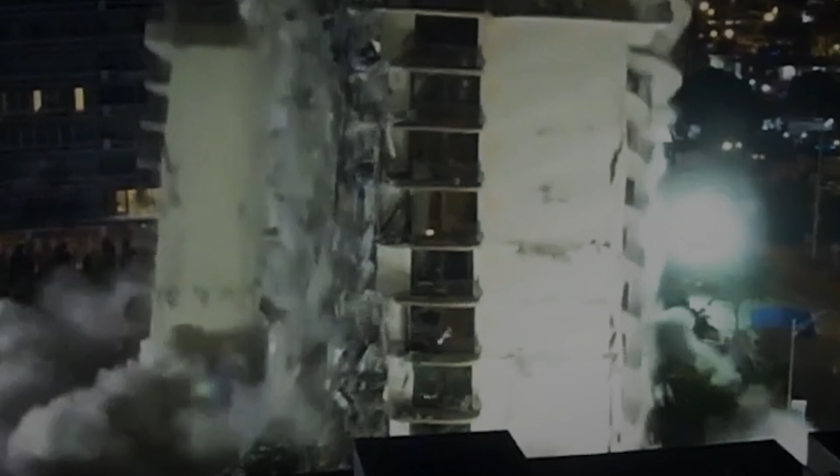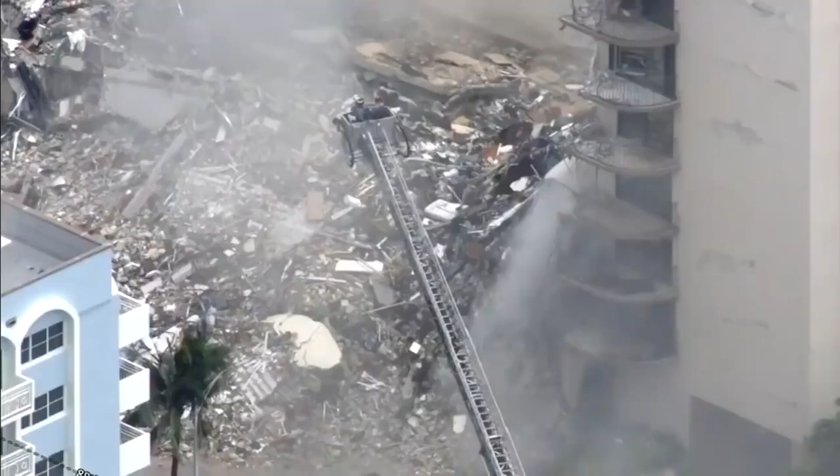For over 40 years, this 12-story condo had been the perfect place to call home, with a beachside view and a pool to enjoy, it was the ideal spot. But on the night of June 24, 2021, the building collapsed. In just a few seconds, it not only turned into a pile of rubble, but 98 lives were lost. All that remained was the broken pool deck, half-standing columns, and concrete chunks.

Hi, I'm Mohsin Khan, an engineer here in New York City, and today we'll look into the Miami condo collapse, one of the deadliest building collapses in American history.

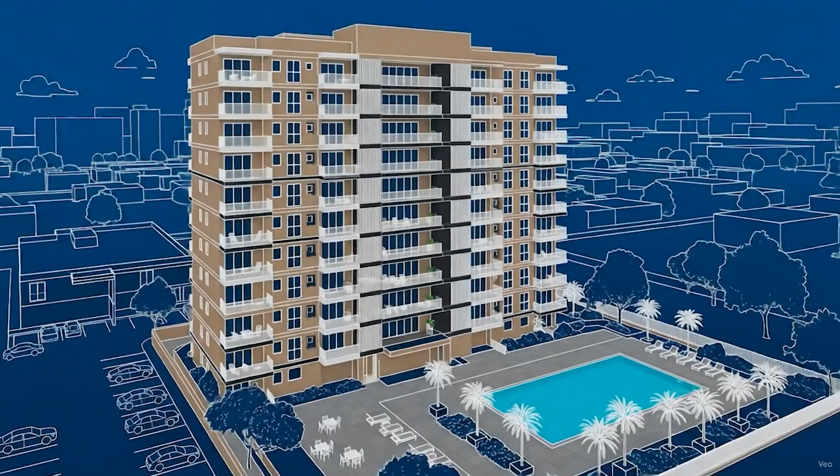On June 24, 2021, at 1:15 a.m., the pool deck of Champlain Towers South collapsed. And the very next minute, at 1:16 a.m., the security guard at the front desk, scared and confused, called 911, but couldn't explain how bad the situation really was.

Okay, I'm trying to track them. Hurry up, there's a big explosion. Okay, sir, tell me exactly what happened. Sir, what's going on? Tell me exactly what happened. I don't know, there's a lot of smoke going on, I can't see anything right now. You see smoke? Get out of here. Sir? Hello?

Before any help could arrive, at 1:22 a.m., the city witnessed a disaster that would change everything. This 12-story condo building where over 100 families lived is completely gone.

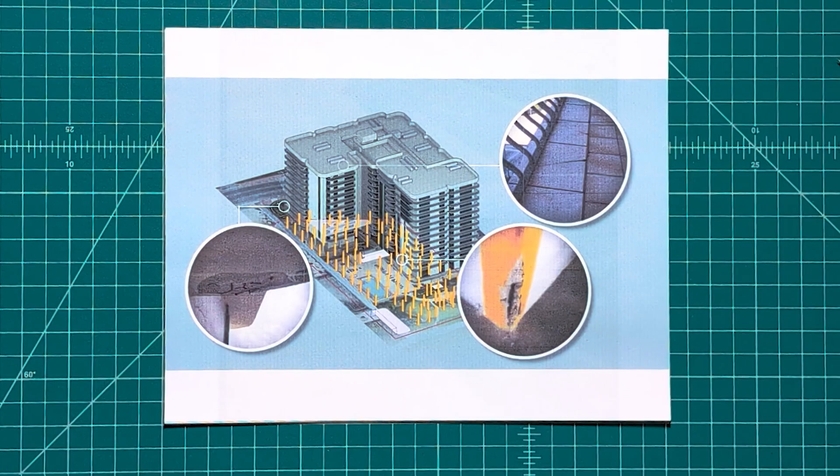But this tragedy could have been avoided, because back in 2018, an engineering report done by Morabito Consultants actually flagged serious problems. It warned about major structural damage, including the exact issues that would later cause the collapse. It pointed out deteriorated concrete and damage to the column, but unfortunately, it seems like no real action was taken. Apparently, they were focused on closing the pool for repairs instead.

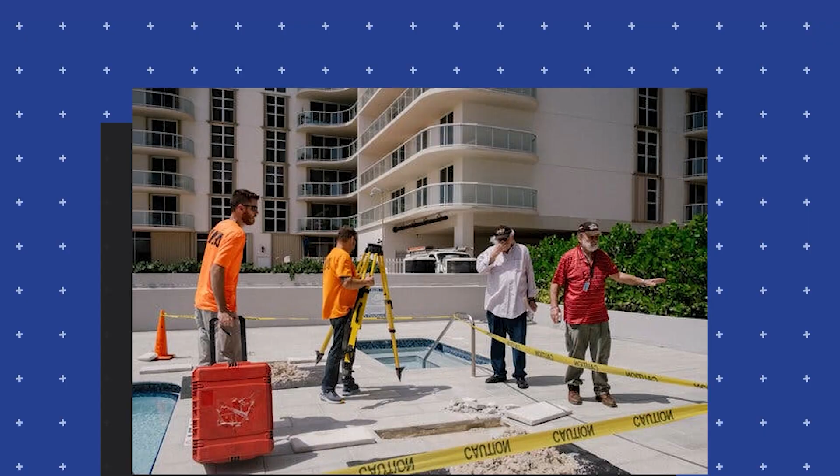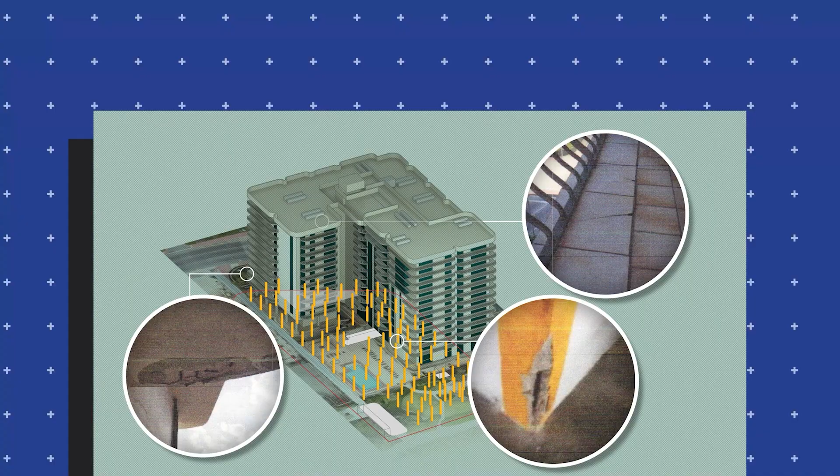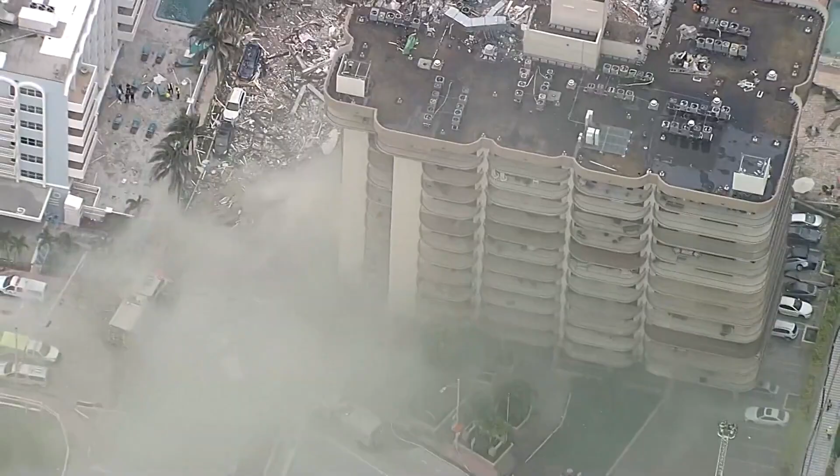This first interpretation does seem to make sense. After all, a lot of what we know about the Surfside condo collapse points in that direction. Engineers and investigators noticed signs of trouble pretty early on: cracks in the concrete, water getting into places it shouldn't, and parts of the structure slowly wearing away over time. It wasn't some big sudden thing out of nowhere. It was slow, it built up over years. Tiny problems that didn't look like much at first, till eventually they added up to something impossible to ignore.

This is often how buildings, even solid concrete ones, can fail. Not because of one dramatic mistake, but because of lots of smaller things being missed or left alone for too long. In Surfside, that's what makes the story especially heartbreaking. People were living their everyday lives, never imagining that the ground beneath them was slowly starting to crumble.

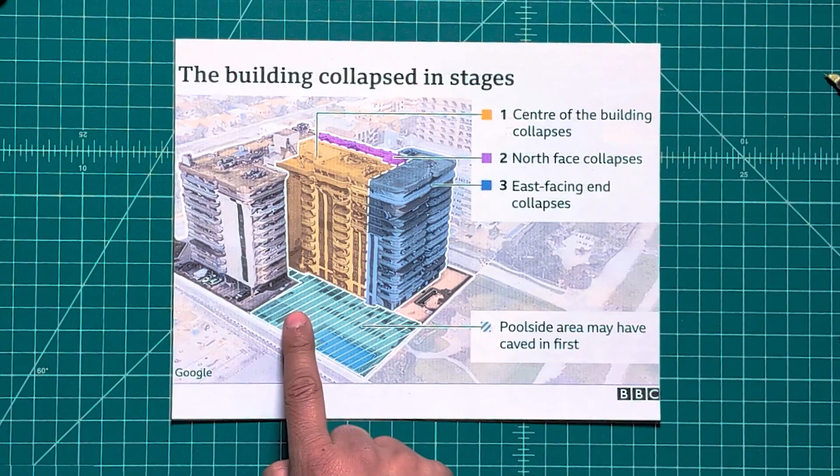It turned out that around 1:15 a.m., before the building had collapsed, it was this particular section, the poolside area, which had gone first. This really put things into perspective, as now it seemed pretty obvious that the slab had started this domino effect. You might be wondering, how can just one slab of concrete hold up an entire building? And honestly, it's a good question to ask. How do these slab foundations work?

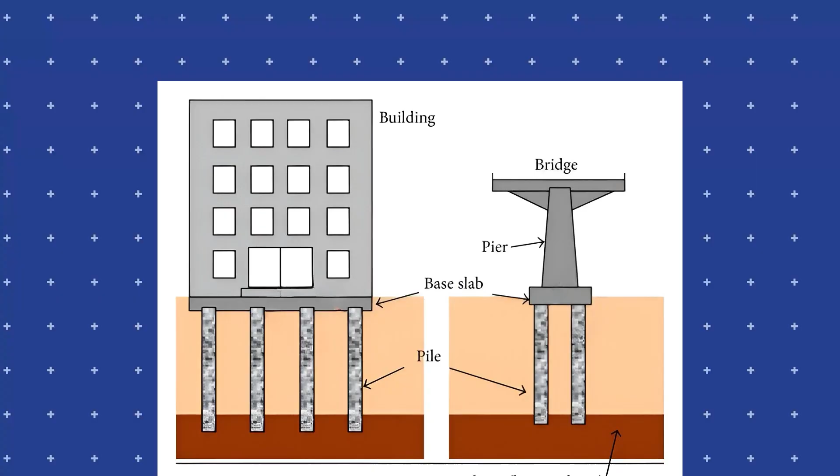This is the kind of foundation system you'll find in a lot of buildings, like the Champlain Towers. If you look at the bottom, you'll see these vertical supports, or what we call a pile. Think of them as the main legs of the building. They go all the way down, and basically, they're there to carry the entire weight of the building on top of it. Now, sitting right above those piles is this big, thick concrete layer called a pile cap.

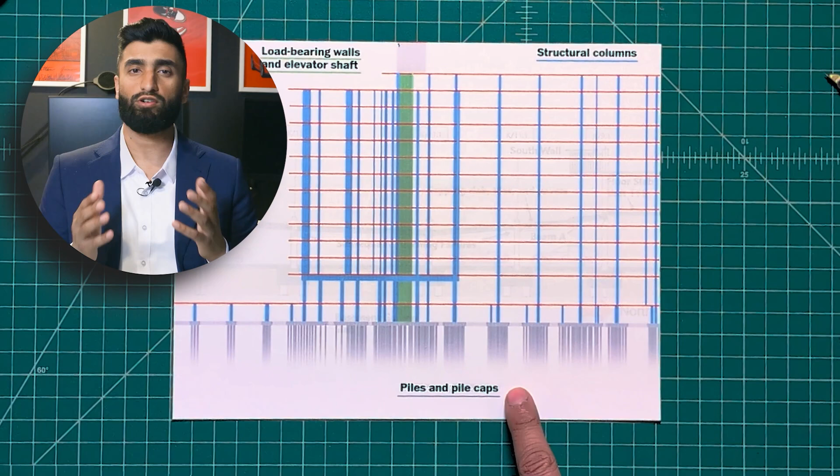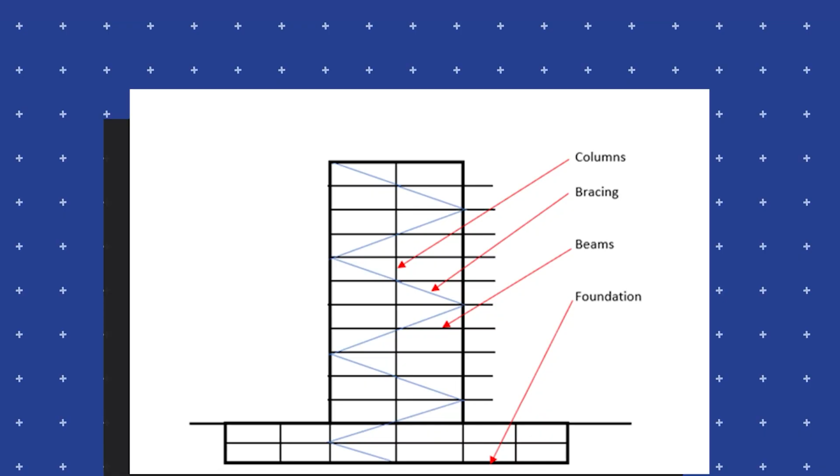Basically, it's a super strong layer of concrete built to take the weight of the building on top through the columns and spread it throughout the area and into the pile it's sitting on. From there, the rest of the building gets stacked right on top of that, all the floors where people live or work. Those upper floors have their own columns and walls, and all of that transfers the load down to the foundation slab and the pile caps at the bottom, which then transfers the load to the piles in the solid ground underneath. With that kind of structural system in mind, let's go back to what happened that night.

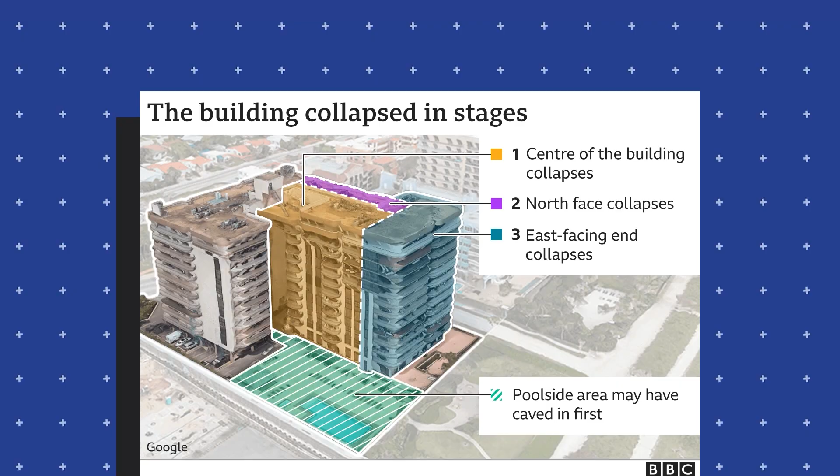Remember, the pool deck was the first part of the building to fail, and that's our clue to where the problem first started. But the entire 12-story building didn't come down all at once. It actually took a few more minutes, about 7, getting us to about 1:22 a.m. for the rest of the building to fully collapse.

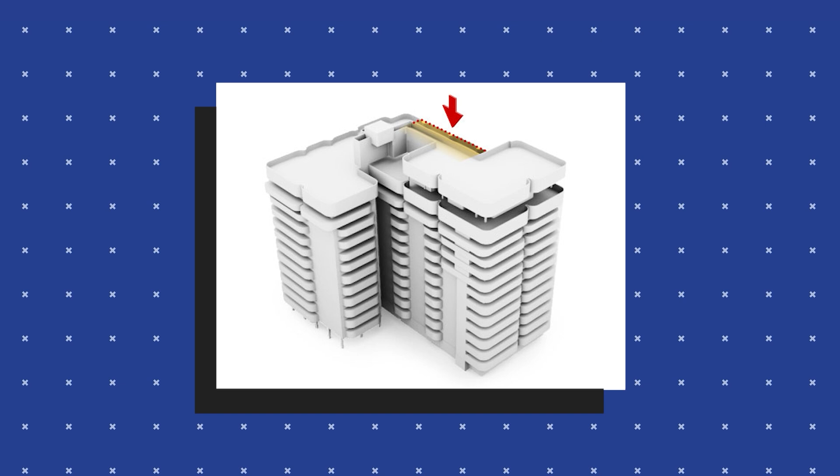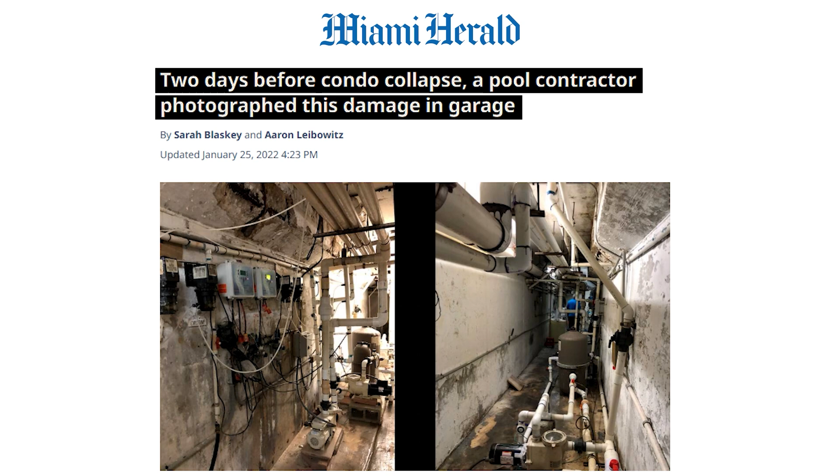The answer boils down to something called progressive collapse. Even though it started at the pool, that failure caused a massive jolt of stress on the rest of the building instantly. The structure was already in bad shape, weakened over the years by damage to the concrete and waterproofing. It just couldn't take that sudden shift in weight.

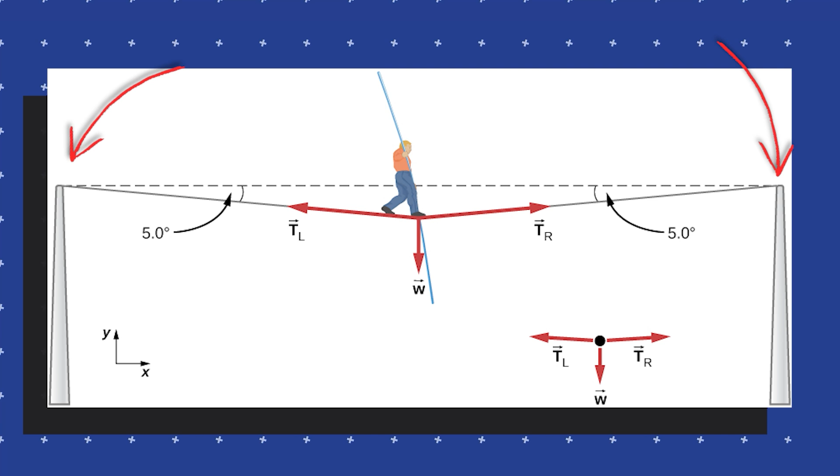To understand why that initial failure happened, let's use the example of a tightrope stretched between two poles. If it's not held tight or supported well enough, even a little bit of extra weight in the middle can make it droop down too much or even break. And that's sort of what's going on underneath in a structural sense.

What investigators found was that the pool deck slab didn't have enough steel rebar. This meant it wasn't strong enough to properly distribute the weight. Also, the columns underneath were too small for the weight they were supposed to carry.

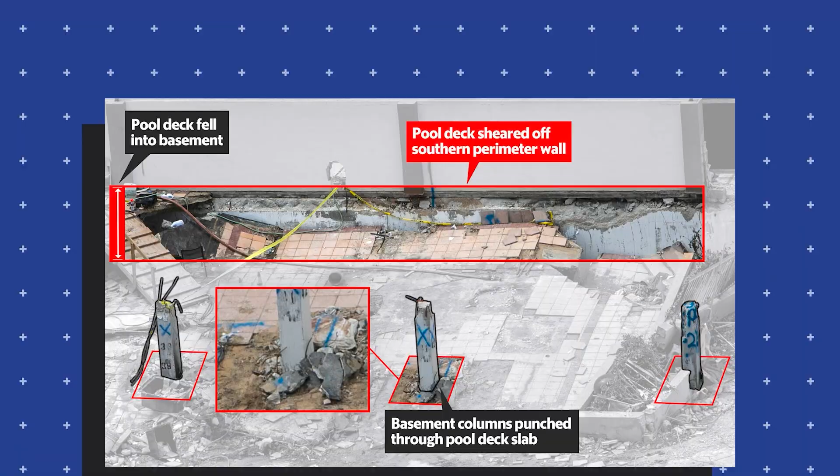Over time, this caused the slab to slowly sink around the columns, which led to a structural problem called punching shear failure. This is a type of sudden failure where slabs fail around concentrated loads like the column, and it looks like the column punches through the slab.

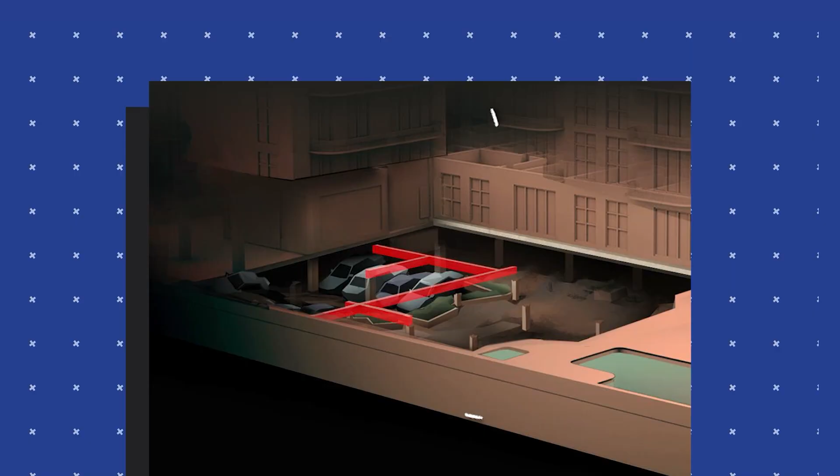But even with these weaknesses, the building was still standing, not because it was stable, but because something else was keeping it together: the beams connecting the building and the pool deck slab. They used a drop beam with an L-shaped rebar connecting to the first floor, but there was no L-shaped rebar connecting to the pool deck.

The investigation suggests that it was the wall beam connection that finally set everything off, and we can actually see this. Look at this picture taken right before the tower collapsed. You see, these cracks are telling us that there's something seriously wrong with the structure.

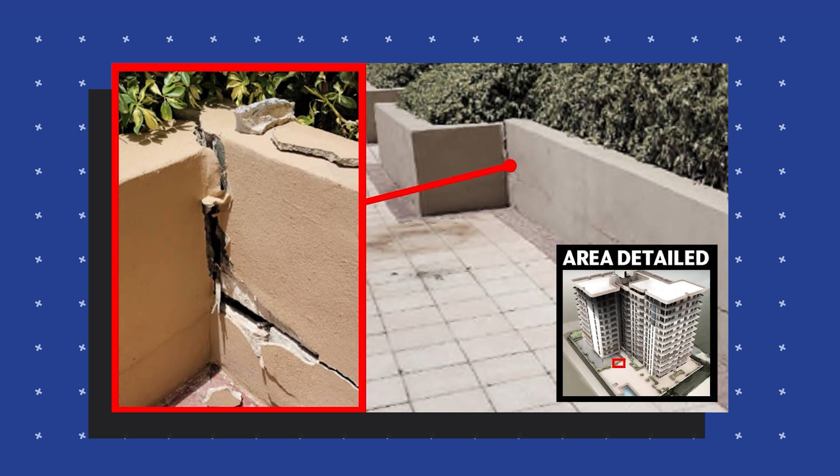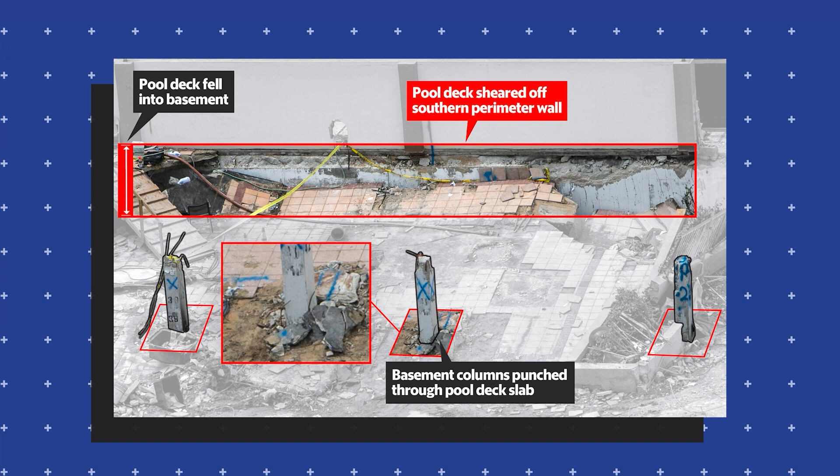The heavy planters put too much weight on the pool deck slab and it couldn't support it. Concrete around the column broke away, the deck fell down into the garage, and that's when the collapse started to spread. Experts looked at the rubble to get the bigger picture and revealed something quite interesting.

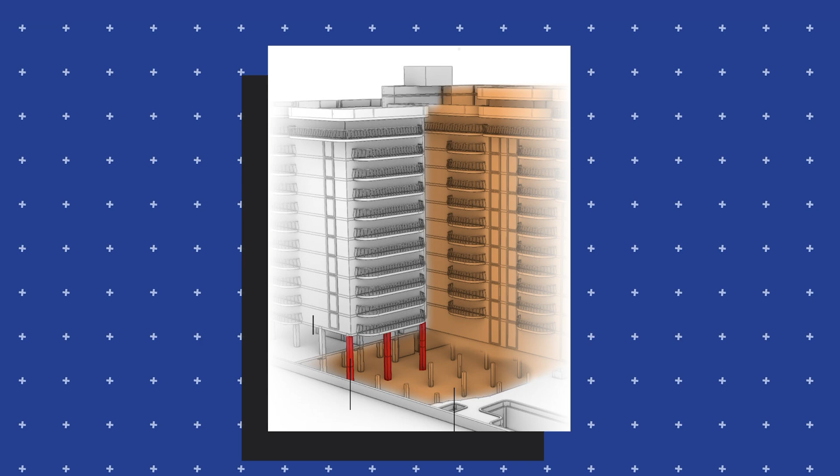Turns out, the building itself had a hidden flaw in its design, and it had been there for decades. In an article for the Miami Herald, Sarah Blaskey explained, Champlain Tower South was flawed from the very beginning. A lot of the columns were designed too slim for the building, especially in the most important spots. And what's worse is that the contractor actually squeezed them even smaller just to get more parking space. Let's look at this diagram.

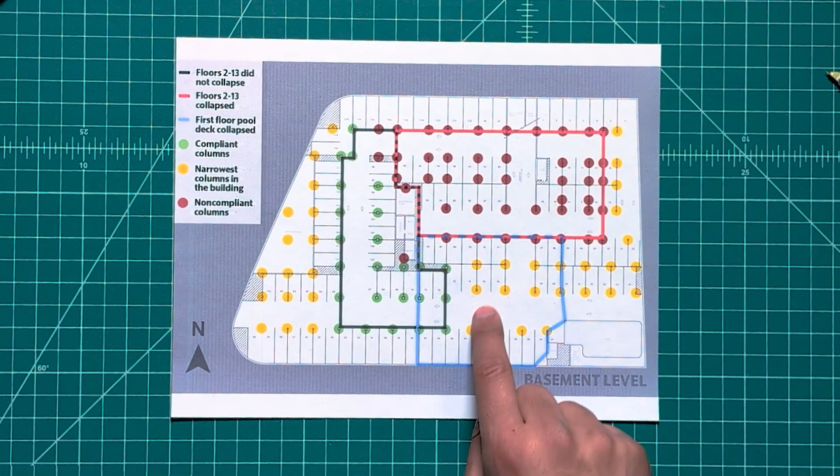These dots show where the columns were placed to hold up the concrete slab base. But what the investigation found is that these red and yellow sections show where the columns were either not up to code or just super slim compared to the rest. You could see here that only the green ones were actually good enough, and it kind of makes sense why only that green part of the building didn't collapse.

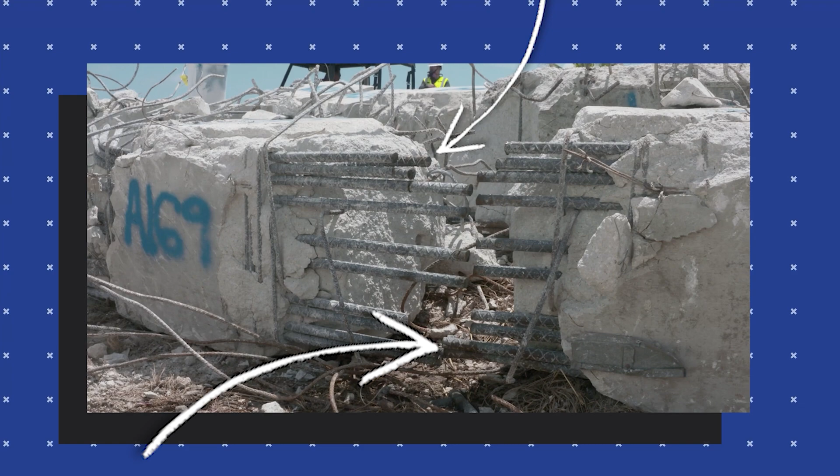You see, these are the very cracks that allowed water to seep in. This water then started to rust the steel rebar inside, and once the rusting process begins, the steel starts to get weaker. The steel inside this building was deteriorating for many decades.

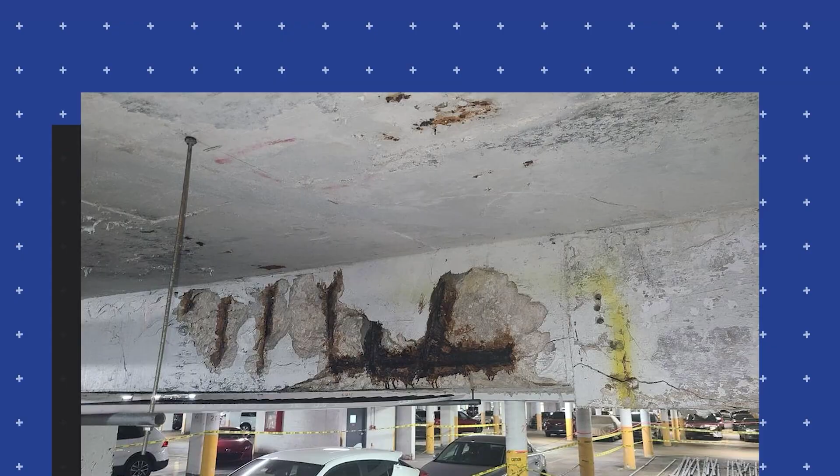Another finding by Morabito Consultants was pretty alarming. The waterproofing had failed, and it was causing major damage to the concrete below. It warned that if the waterproofing wasn't replaced soon, the deterioration would only get worse, much worse.

If you look at the report, you'll see that they focus on the pool deck and the surrounding areas. It clearly stated that the waterproofing had reached the end of its life and needed to be replaced entirely. They also noted significant cracking and spalling, chunks of concrete breaking off on the columns, beams, and walls right under the pool deck and entrance. So this wasn't just a surface issue, it was impacting key structural elements.

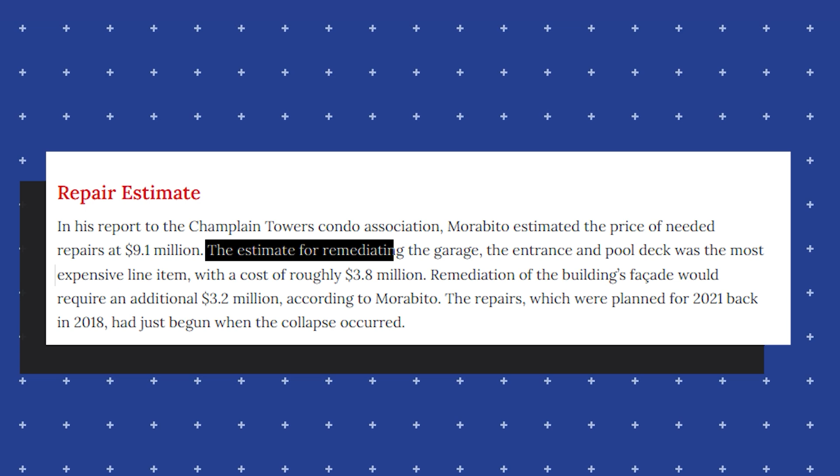Even though these issues were documented by engineers, it looks like nobody did anything right away to fix them. Now, these repairs weren't going to be cheap. The report gave an initial estimate of around $3.8 million in 2018 to handle the concrete repairs and replace the waterproofing for the pool deck, plaza, and garage. That's a hefty price tag, and it's probably safe to say that money played a part in why nothing was done.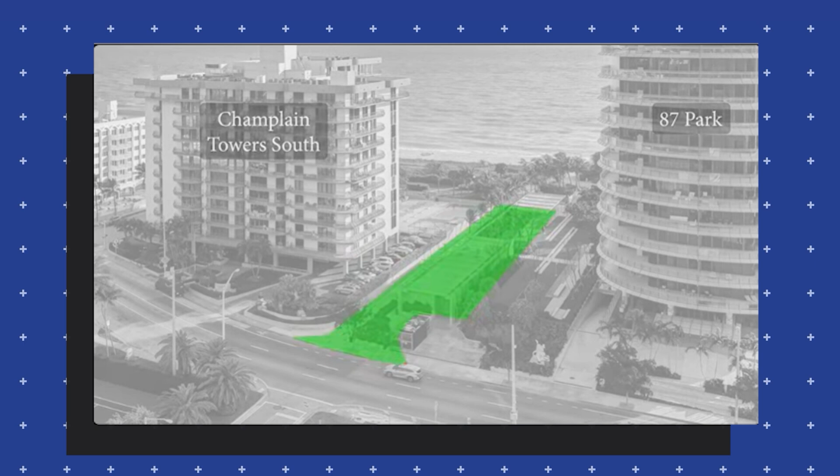In the years before the collapse, there was this big construction project right next door at 87 Park. This was a large-scale project going on from 2015 to 2020 and involved some pretty intense construction work basically right beside the tower. The developers of 87 Park even got the city to hand over the road next to Champlain Towers South, and they built parts of their foundation right up against the south wall of the building.

During all that construction, people living in Champlain Towers South kept saying they could feel the vibrations from 87 Park's foundation work. And it wasn't just a little shaking, they could feel these vibrations everywhere on their property. What's even more concerning is that some residents began noticing new cracks popping up in their own apartments and on their balcony walls during this time.

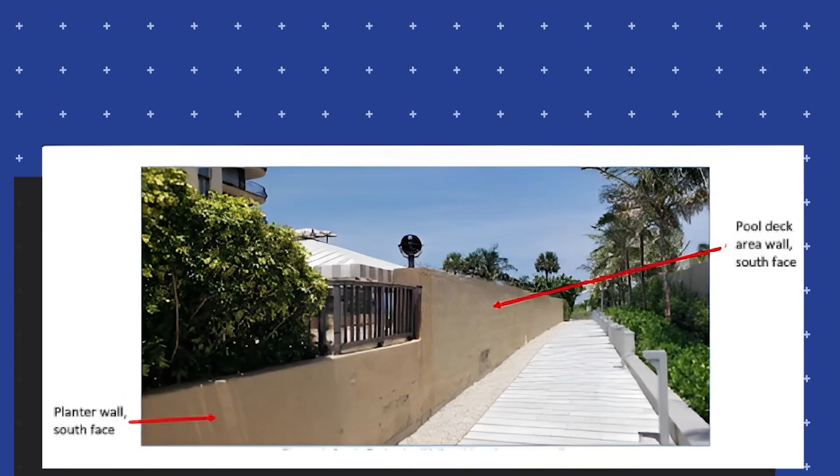So they called back that same engineering company, Morabito Consultants, who had given that warning report in 2018 to come check it out again. And yeah, new damage had appeared right there on the south side of the pool deck, where the slab meets the wall, exactly where they think the collapse began.

But even with all these complaints and the engineers saying there was new damage, nobody was evacuated. And they didn't put in any emergency fixes like temporary supports to hold up part of the building while they figured out what to do about the repairs.

One thing's for sure, it wasn't just a single thing that went wrong here. It really looks like a bunch of problems all came together in a terrible way. There were clear warnings, and for whatever reason, they weren't acted on. That's a really hard thing to accept.

So in the end, the officials had to make the tough decision. They ended up demolishing the rest of the building too. Honestly, the call was really driven by safety above all else. Engineers deemed it too risky for anyone to be around, especially with rescue teams still on site looking for survivors. The concern was that it could come down at any moment, which would have been catastrophic.

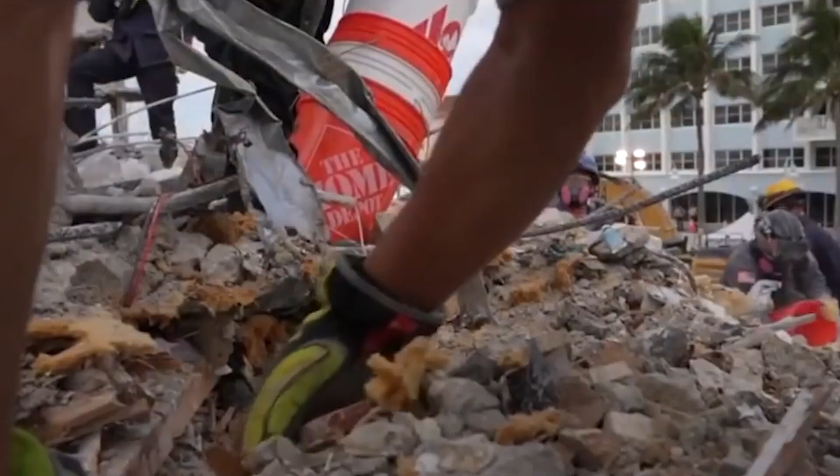Plus, taking down the rest of the building actually helped with the investigation. With that part still standing, it was blocking access to debris and making it harder for investigators to understand what had gone wrong. But by bringing it down in a controlled way, they could finally get a much better look at the whole scene. But there's still an important question.

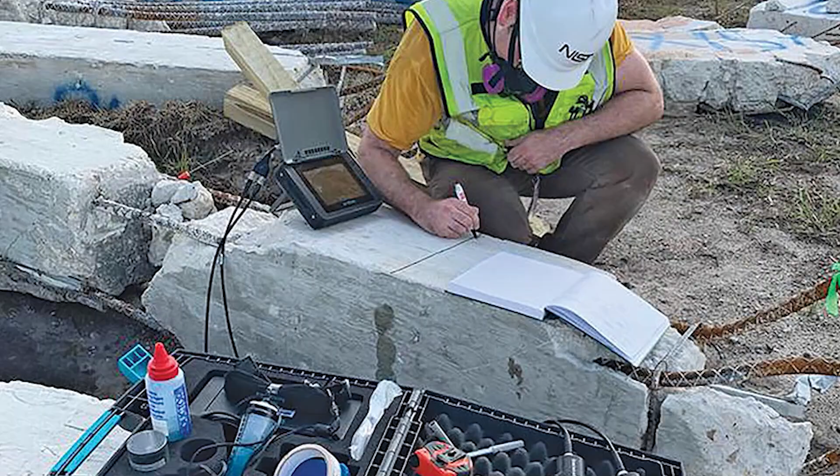Who's to blame for all of this? It's a complicated issue and the investigation is still ongoing. But when you think about it, everyone involved played a part. The engineers who originally designed the building, the condo board responsible for maintaining it over the years, and even those who were supposed to check if it was safe.

This whole tragedy shows just how crucial building safety is and how everyone needs to be vigilant all the time. Ignoring glaring red flags just can't happen. At the core of this disaster is trust. We trust these buildings to keep us safe, and when that trust is shattered in such a devastating way, it makes you wonder, are we doing enough to ensure something like this never happens again?